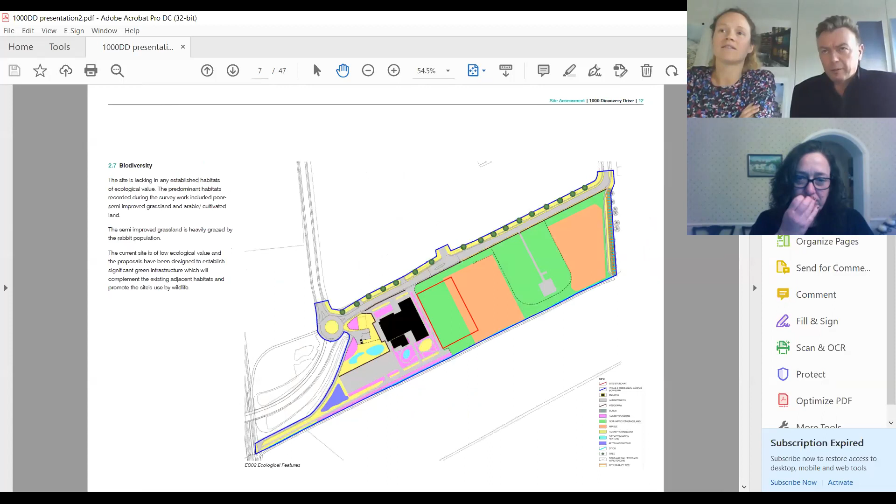So we're going to take you through this. This is actually part of the stage 3 report, so we'll run through this slide. It explains the project, some of the constraints and site issues, and then we go into a bit more detail. Please ask any questions via the web chat.

I think we all know where we are here. It's south of Cambridge, on the Biomedical Campus. If we click the next slide, you can see here it sits in relation to the new AstraZeneca building in the center of the image, and we're adjacent to the Abcam building, which is now complete.

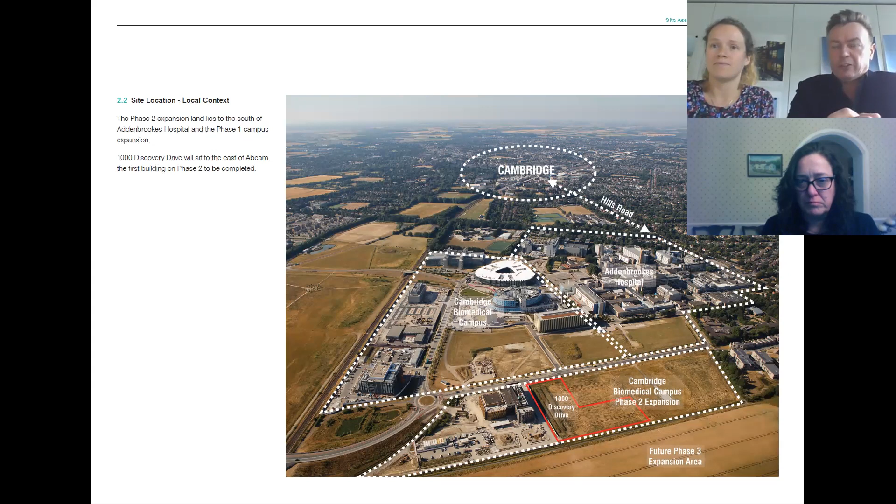This is a slightly old photo, of course, and the site sits on what's known as the phase 2 expansion of the Biomedical Campus. It's the next building along, and we'll see how that whole phase 2 is going to be expanded in the future. Beyond that, there's phase 3 eventually, which sits further south of that site. Here you can see the site location plan: the blue line being the extent of the phase 2 allocation, and the red line is our planning boundary, or as it was.

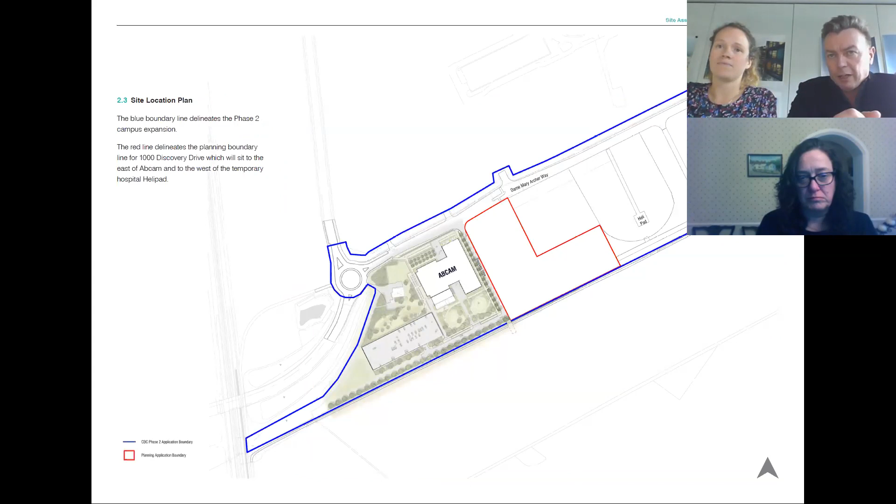As you can see, we've got Abcam sitting next to our site, and the two plots sit very close to each other. These photos, slightly old again, show the Abcam building, which is really a lovely building. If anyone gets a chance to look around it, it's a fascinating design.

We're sitting adjacent to that, and it's worth looking at the materiality of the Abcam building in its context. On the Biomedical Campus there's a whole range of different styles and approaches to the architecture, the latest being the AstraZeneca building. It's worth seeing how this develops, especially in the phase 2 element, because the buildings are structured so they read as a continuation, a family of buildings sitting within their own grouping.

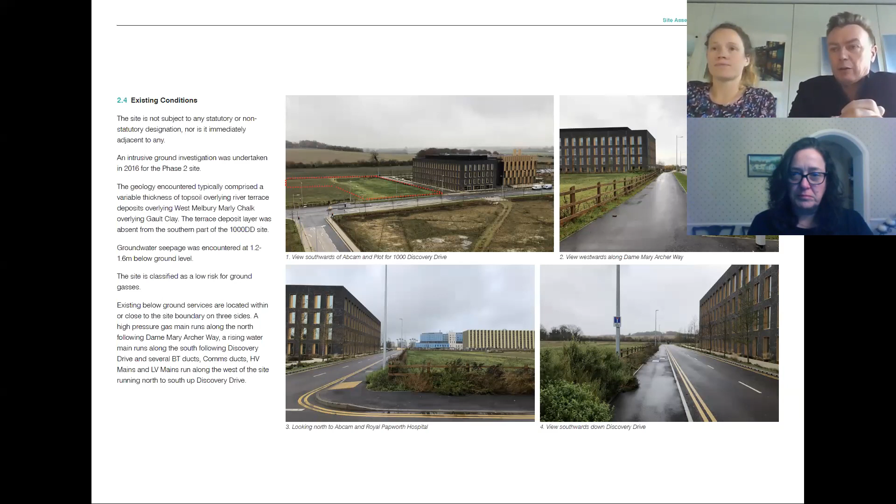As for the site history, it was a greenfield site, just agricultural land to the south of Cambridge prior to the development of the Biomedical Campus. It sits just within flood zone 3, which is medium risk of flooding, with further flood risk assessments carried out by Aecom for the zone itself - it's a very low risk area. But as we know, Cambridge is predominantly flat, especially in this part of town, so it's all of a similar level.

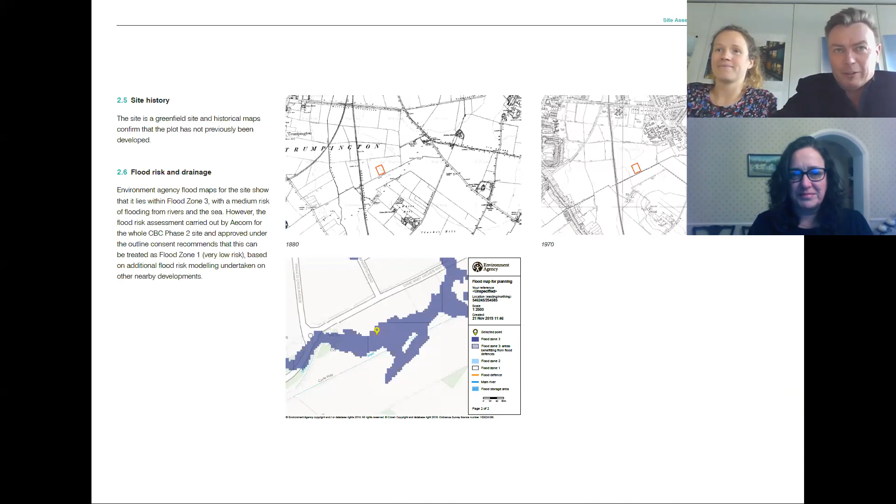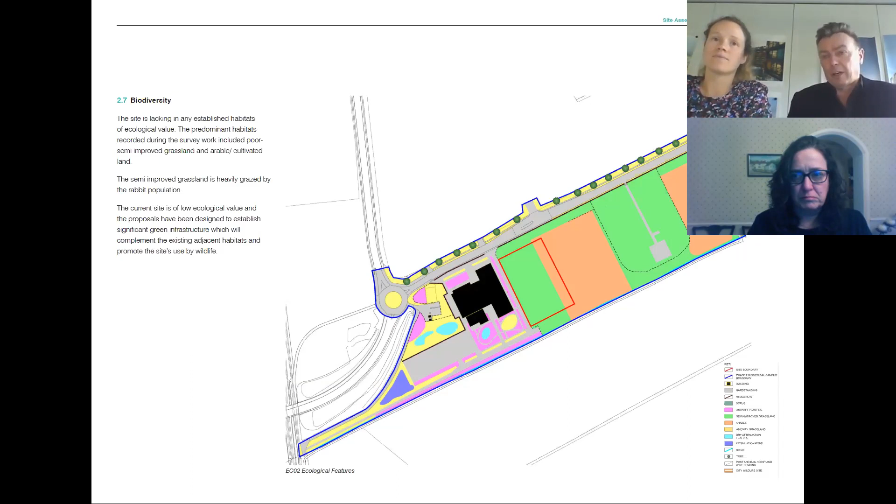It's essentially at the moment just grassland with very little habitat, and the aim of the scheme will be to dramatically increase the biodiversity on site and give back to the existing character. Interestingly, in the latest work we've done on biodiversity, we found that improved grassland actually has a higher rating than you may assume, so it means you have to work quite hard to achieve an improvement on a site which is predominantly grassland, which we've had to do here.

The building sits to the east of the Abcam site and adjacent to it, so there's a certain amount of daylight and sunlight overshadowing which happens in the latter part of the year, around this time of year. But generally we've got good exposure, which means two things: we've had to think carefully about the facades of the building in terms of how they work to minimise solar gain, but also we've got some good views, and it's quite an open site, so it's a nice place to be. Certainly if you go to the Abcam building, you can see the rooftop terrace is very nice for that.

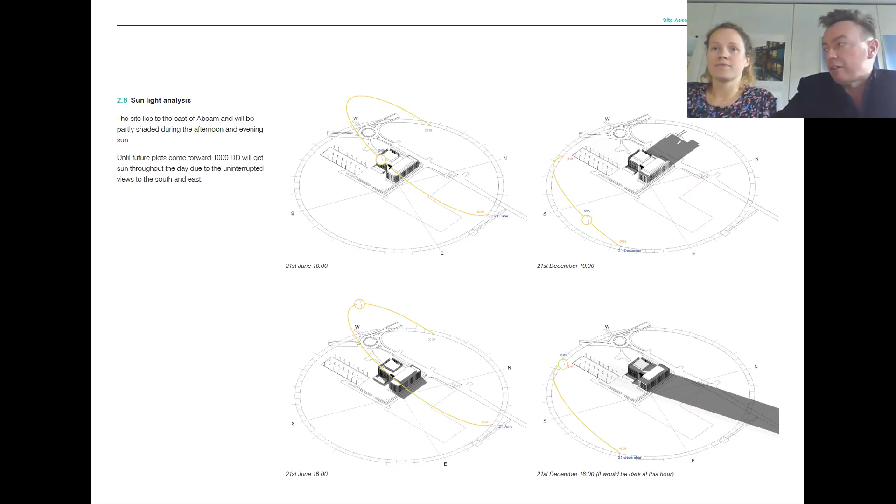As Ed's already mentioned, Cambridge is pretty flat. The site here is also quite flat, and the existing levels down Discovery Drive, the road that separates Abcam from this next plot, is the only real constraint we've got in terms of site levels, because that road's already established and built. That road will continue along the south of the site, so we just need to tie in with those existing levels.

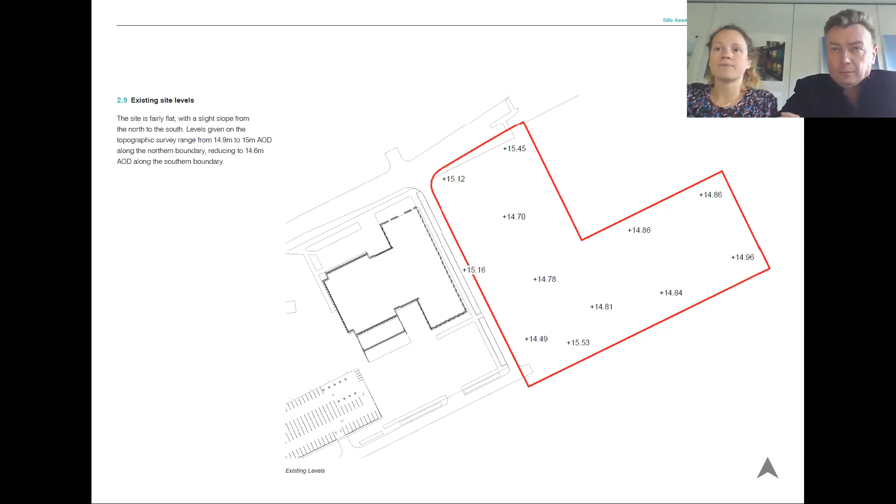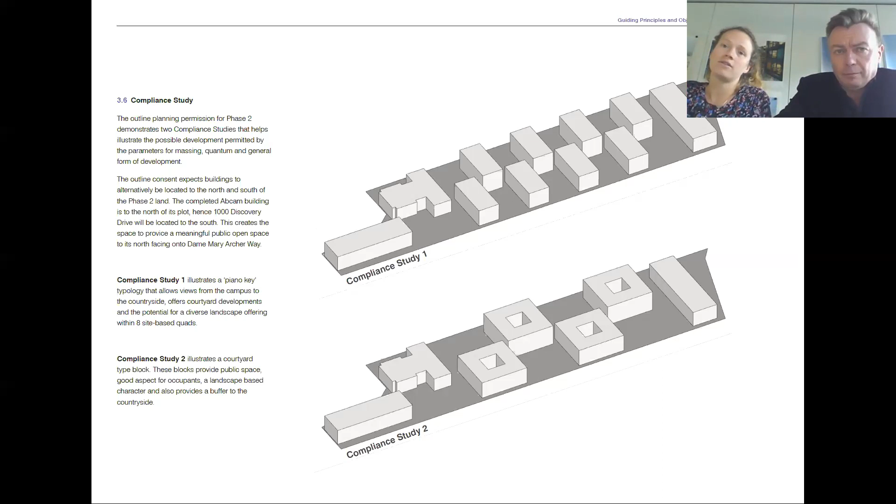This shows you the compliance study. The outline planning permission for phase 2 had two studies undertaken for the potential development permitted by the parameter plans for the massing and quantum of general form of development. Compliance study 1 at the top shows an almost zipper kind of configuration of buildings, stepping in and out, and we did a lot of thinking about how we connect them up, whether we had an internal route running through. Compliance study 2 shows courtyard type blocks sitting in a similar configuration, but bigger buildings, more akin to what we're doing. In between the buildings, it was important that there are green public realm spaces dotted from top to bottom, and that all the buildings along the north can be slightly higher than the ones on the south, as part of the parameter plan.

This shows you the hybrid compliance study. The outline permission allowed for a hybrid approach, so we have 1000 Discovery Drive, which is more halfway between the courtyard and finger building types. It sits to the south of Abcam, to the southwest of Abcam, and the future plot will be developed similarly. There may be changes that come, but predominantly that will be the form of development going forward for the future plots 3 to 7.

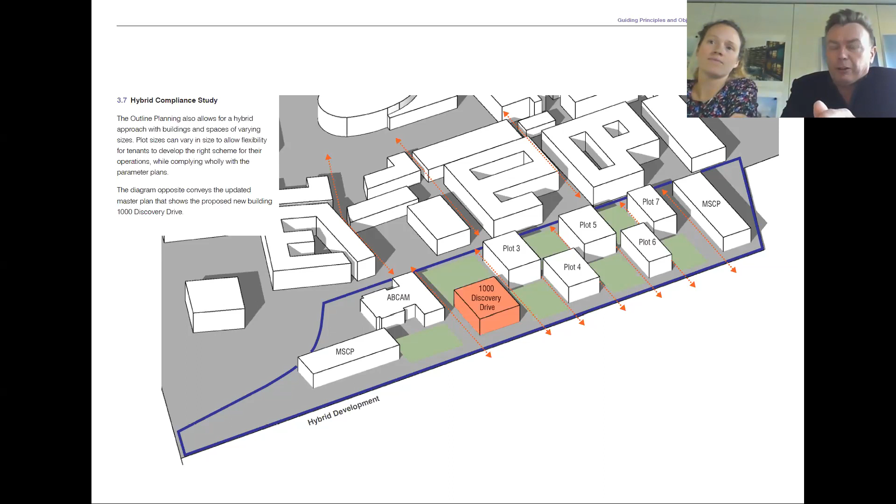Looking in a bit more detail at some of the constraints and opportunities: the zone for development we could actually build in is outlined in the parameter plans. We already know the top bit along Dame Mary Archer Way and the bottom along the landscape buffer is the extent of our site. We've also assumed the next plot, our plot for 1000, would sit to the south of the site. We've got maximum building heights, which don't include the flue height, so for any science and lab building the flue heights can be above and beyond this parameter height. We've also got to factor in a couple of six-meter views in phase 2 that allow views from the Cambridge Biomedical Campus through to the landscaped Cambridge countryside beyond, highlighted in that blue arrow, so we make sure that zone is provided. There's also a high pressure gas main that runs along the north of the site, shown in the orange dashed line.

There are a few constraints that limit us, but there's also loads of opportunities. Ed's already mentioned it's a great place for views, we've got views out across the countryside, we're right next to Abcam, and it's just a great place to be located on the campus and to create this new family of buildings.

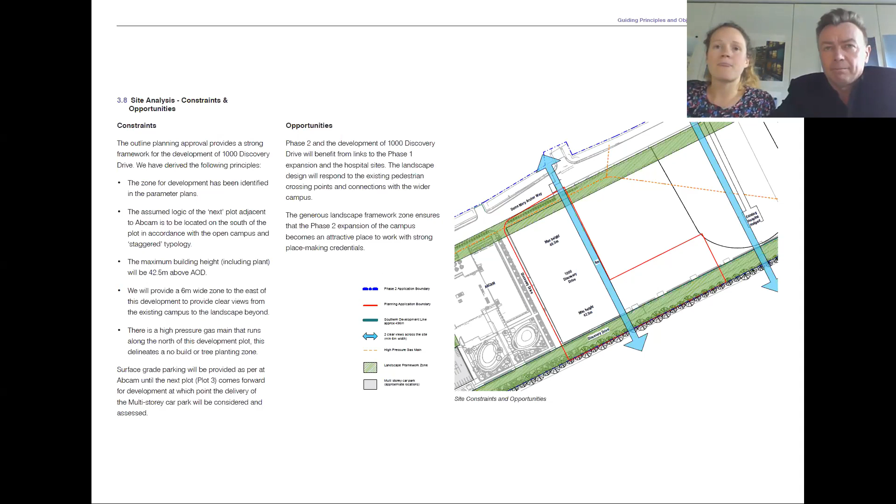So we undertook a number of massing option studies from an early stage. We looked at the building having a U-shaped plan, a donut building, or a staggered H, and each of these was examined for a number of factors: how it sits on site with the parameter plans we've got to work with, the compliance studies we showed you earlier, and what kind of building this is. This is designed to be a multi-occupancy laboratory building.

We've done one on the science park, which is a much smaller version, but this requires a lot of flexibility to be built in, which dictates quite a lot about the plan form. We'll come on to that, but you'll see how that works.

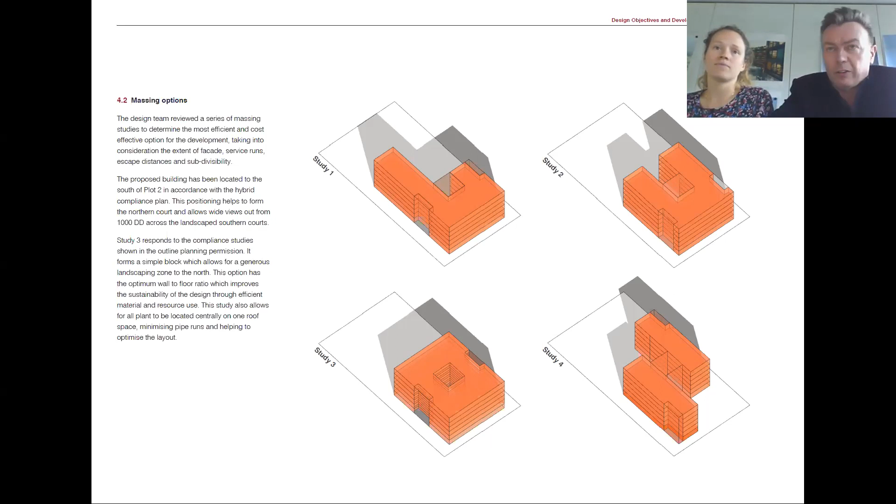So the building became predominantly a square in plan, and then sits back from Abcam so it doesn't obscure any views, but it also has its own freedom and views, and then creates this public space to the north of the building, off Discovery Drive.

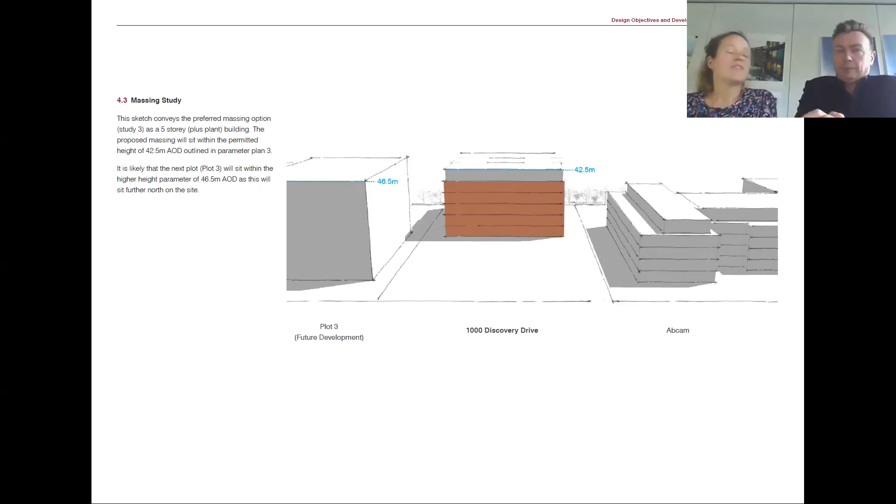The square plan form, when we were looking at the studies, had a really efficient approach in terms of servicing layouts, as it's a spec office and lab building, the service runs needed to be optimized, the facade needed to be optimized, and this became an efficient, optimized layout that allowed us to achieve everything else. The complexity of the building is almost on the inside, with all the different tenancy options and service runs we can have, so it helped to keep the actual building form quite simple.

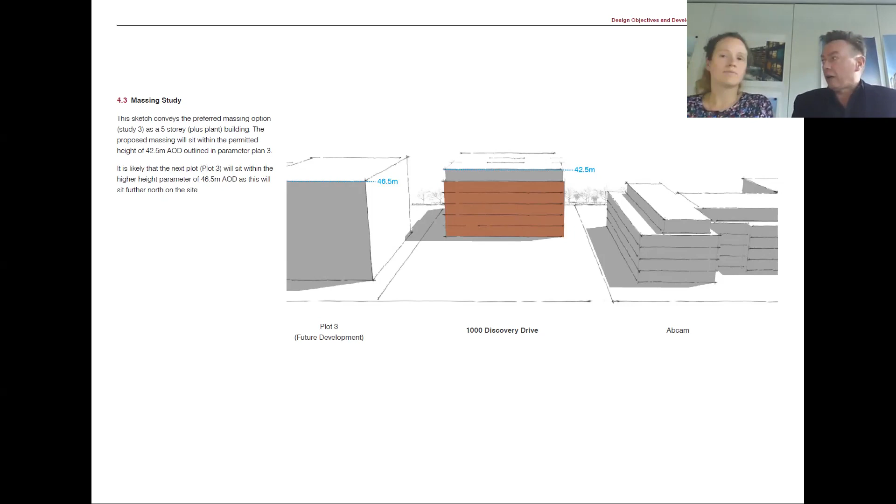I think when you compare that plan to, say, the Abcam building, it's a building of two halves really - on one side it has the laboratory space, and on the other side it has the office space. Obviously if you're doing a flexible multi-occupancy building, those two things integrate and can flow from one to the other, or merge and change. So you can't really do the same kind of H-shaped plan for a building of this nature.

In terms of site layout, we've got the building to the south of the plot, and we were very much working the landscape and public realm to the north. We were guided by key routes, key vistas, the way people approach the site, the way we want to use the site with the sun path, and where people want to eat lunch. We needed to fit all the bicycle stands and really make this a public realm that people want to stay and enjoy, a place where people can work outside.

Discovery Drive along Abcam has got a planted, tree-lined boulevard, so we're also going to mirror that so that Discovery Drive becomes a tree-lined boulevard and a great approach, as that road is the key road that will access the whole of phase 2 in the future.

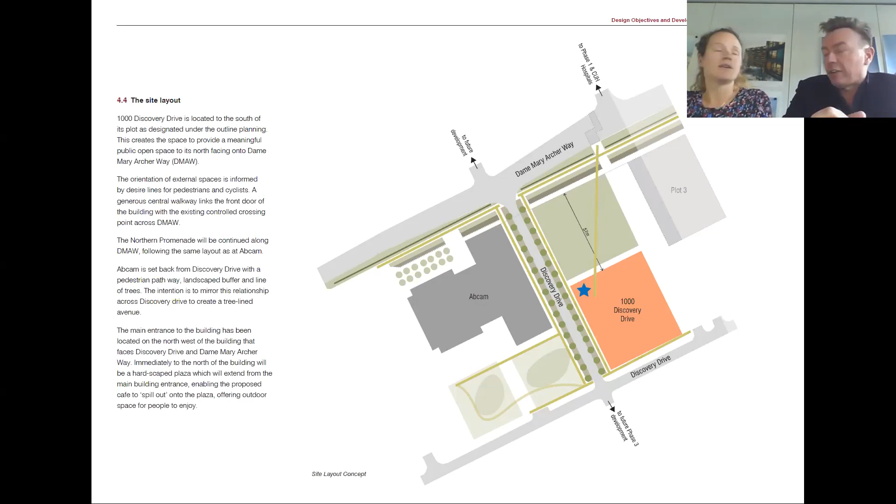And then we've got a diagonal route across from Addenbrooke's and the rest of CBC that comes directly to the front door, that blue star, the front door of 1000. That's informed the layout of the site, but also the plan form and how we've dealt with the entrance way and made a feature of it - quite an important feature.

So you can see that actually on this plan now. The entrance is in the top left corner and is dictated by that diagonal route, which makes quite a dynamic form of entrance. And then, if you want to talk through the plan and how it works.

Sure. So at the arrival space, we've created a central piece that we'll come on to later. As this is a shared multi-occupancy building, there's a cafe, a co-working space, and reception all on the ground floor as you enter into the building, which has got some double height to create a nice atmosphere. Then the building itself has a central core that serves all 5 floors, and 2 side cores for escape routes.

We've put all the plant we can on the roof, but there is a bit of plant, the heavy stuff, on the ground floor, as well as changing rooms, showers and everything for cyclists and runners. And then we've just optimized and maximized all the lettable space where we can. On the ground floor, for instance, this is located on the south of the building so that they still get those views out to the countryside and the landscaping beyond.

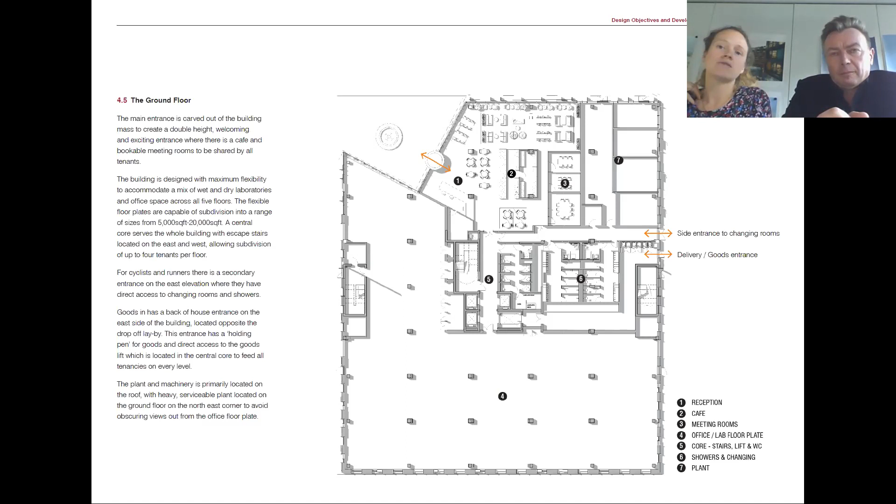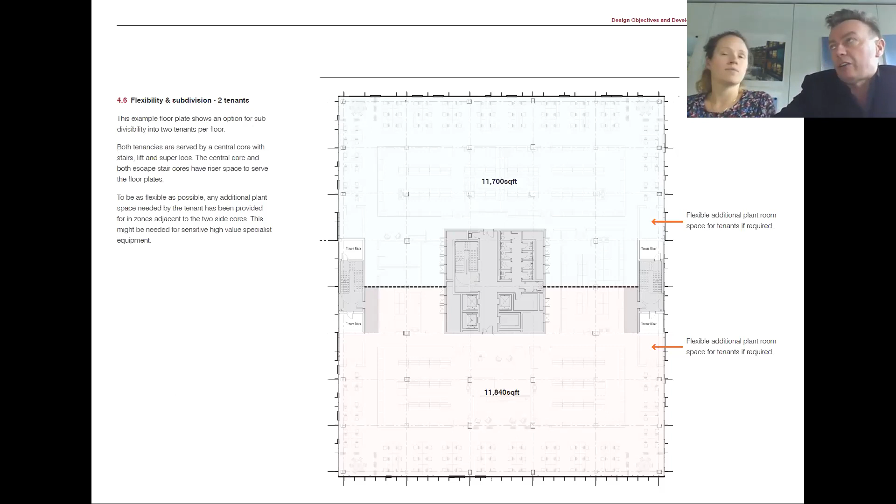And this building is to a shell and core, so it's not dictated at day one about how it's split or how it's divided.

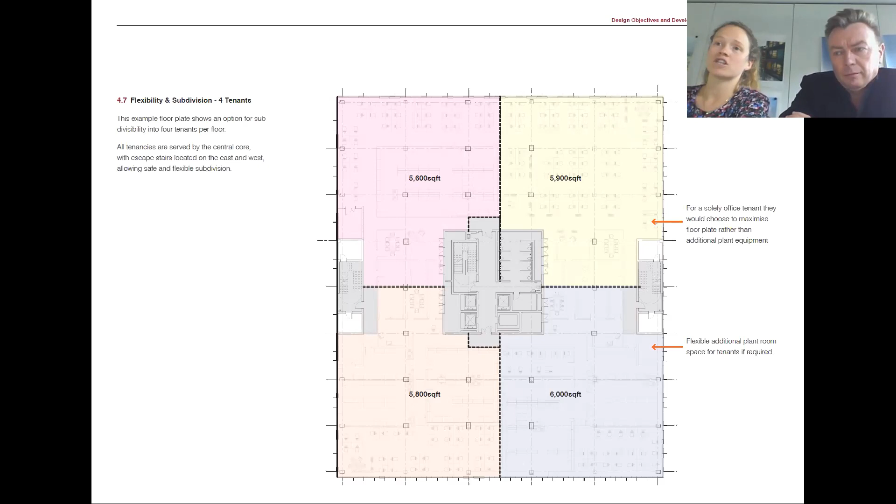Then you have the second option of tenancies where you could split it into 4 tenancies per floor. When you split into 4 tenancies per floor, each one has got to have its own dedicated on-floor plant space, its own dedicated risers and extracts, and equal accessibility to the core, and things like the goods lift. One of the most complicated bits was that even if the floor plate is split into 4 tenancies, each tenant needs to be able to access their risers on every floor throughout the building, hence why such a simple plan actually enabled us to address all the complications internally and make sure the building works functionally for all the tenant options we could end up with.

One of the design features is the entrance space, so you've got a shared communal entrance area. Of course, that means that if you've got a multi-tenancy building, you can't have an open atrium running through it because of privacy issues and that kind of thing, so you would have a glazed-in atrium. It's probably better to have a generous 2-story entrance zone rather than trying to have a glazed vertical riser running through the space.

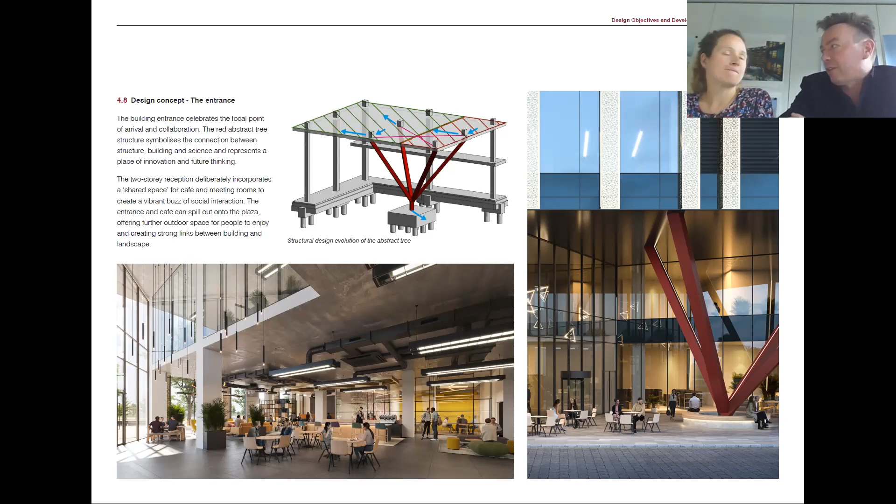And then one of the key features is the structural design of the supporting above the entrance, and we went for this structural tree theme. We tried various options out at the time, and we quite liked that. As the building's cut away, it has this kind of growth of this tree from the middle, which is quite a nice touch. That shows the diagonal form coming in, the entrance feature of the tree, and that transparency cutaway form—it's like a cube with a bite taken out of it.

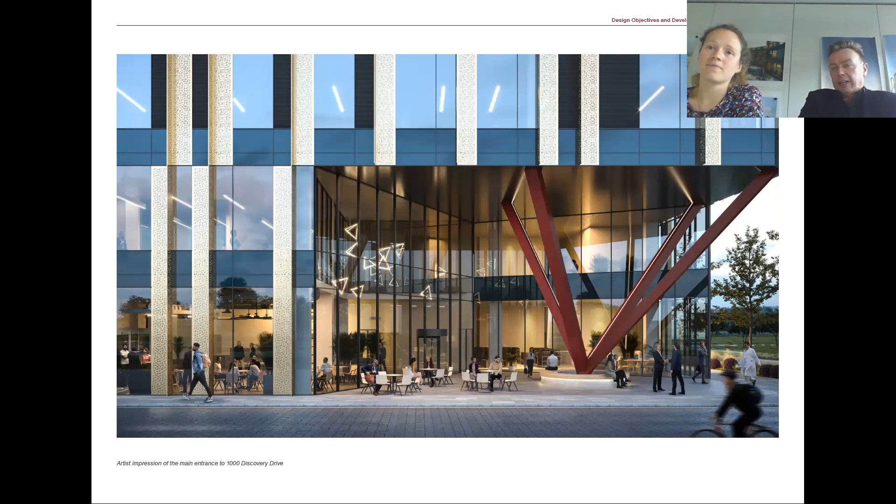So the envelope itself needs to respond to quite a lot of the opportunities and constraints on site. There's a lot of solar gain as the site's quite exposed, and we wanted something dynamic that responded to the sun angles on different sides of the building, as well as privacy in getting the views out, and making sure we've got a really high performing envelope, particularly where we needed it to prevent too much solar gain and prevent the building overheating, and all the energy associated with cooling and heating the building, and how the facade could help us do this with passive design rather than energy.

We also thought it was important in this building to form a dialogue with the Abcam building next door. Abcam sits on its own at the moment in the biomedical campus, and we thought that particularly for this whole phase 2 development, it'd be good if there was a language of a cousin of the Abcam building in terms of its materiality. So we've used similar materials and themes of vertical elements with shading fins on them, deep reveals, and we're using brick around the back, the south-facing side, which has less glazing. The front of the building is actually north facing, so it's more transparent, permeable and ethereal. Around the back, it's much more solid and grounded, which reflects some of the materiality on the Abcam building.

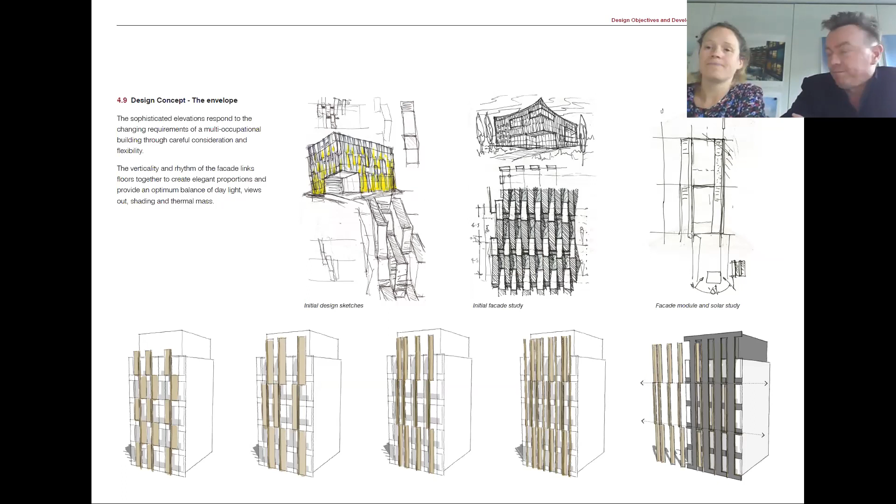I think here you can see a side elevation, and you can see that change of materiality over the side of the building. So on the left here, towards the front and the entranceway, we have this light, glassy facade with perforated aluminium and shading features. Really, that's about filtering light and creating a really nice piece of architecture.

And then to the right-hand side, which is actually towards the south and the more exposed side of the building, it becomes more solid. It has this bricky texture, some deep window reveals to create shading, and a similar color and material palette to Abcam next door.

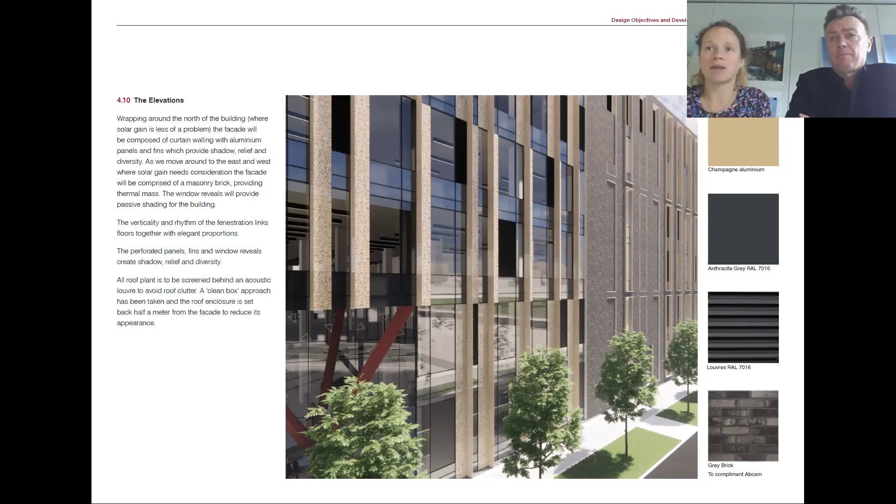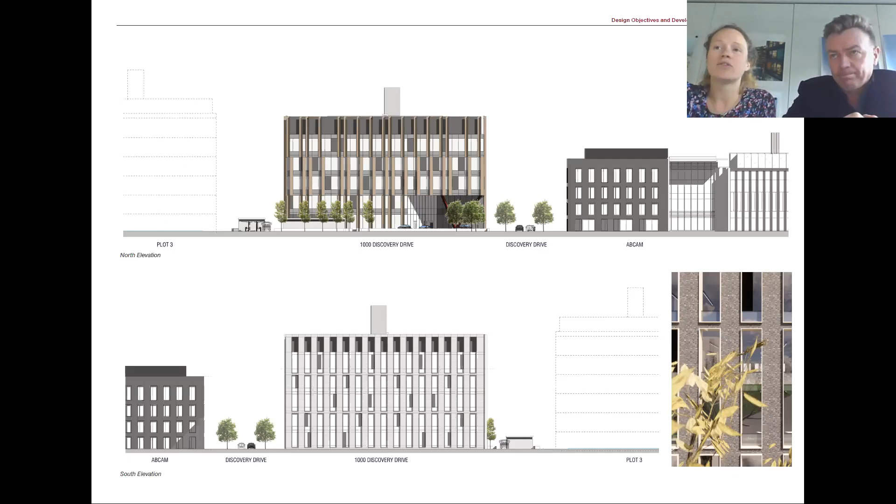This is one of our quite early renders, pre-planning, which shows the aluminium fins with the perforation patterns wrapping around that northern elevation to create that focal entrance space.

It's a lab building, so it has a lot of plant. The whole of the roof space at the top is completely full of plant equipment, screened by louvers at top level. This also allows flexibility and future adaptability, since we don't actually know who the tenants are to start with.

We've designed a clever facade that allows us essentially a random but controlled array of louvers on every tenancy, to allow soft spots where future tenants can plug and play, without having to smash up the facade every time they want to do some work or change a layout. They can plug into the existing louvers on the facade.

Multi-tenanted, multi-floored lab buildings have this dilemma: you have to put in your plant riser space and your central flue extracts, which are landlord controlled and landlord supplied, but also you want to allow flexibility for every tenant to have the ability to change and adapt. So they need the ability built into the design to connect plant to the facade to bring air in and extract.

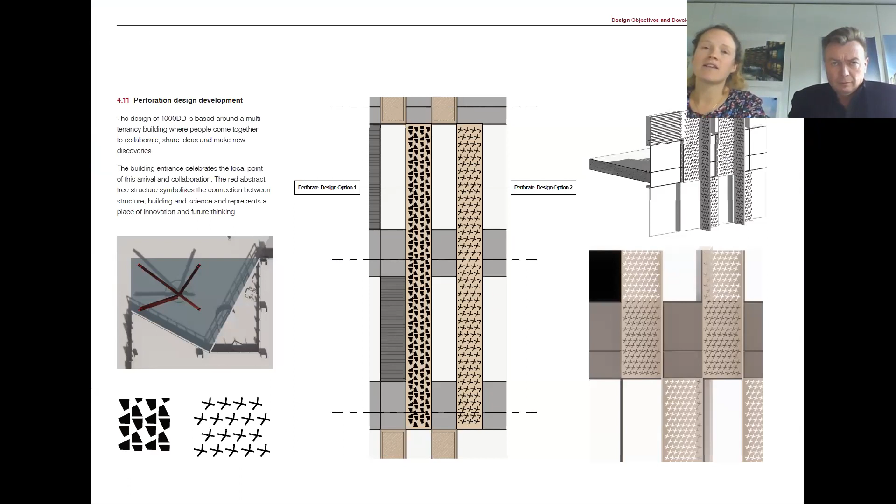So it's a growing dialogue between architecture and the science that it's supporting.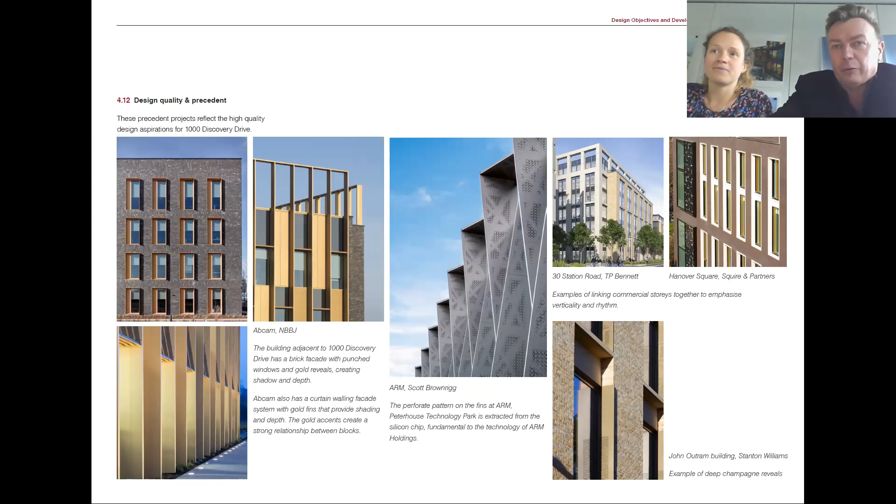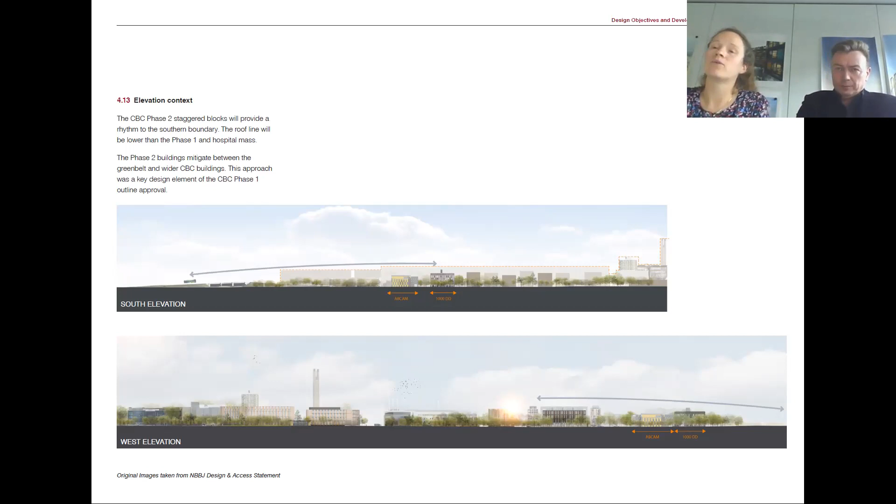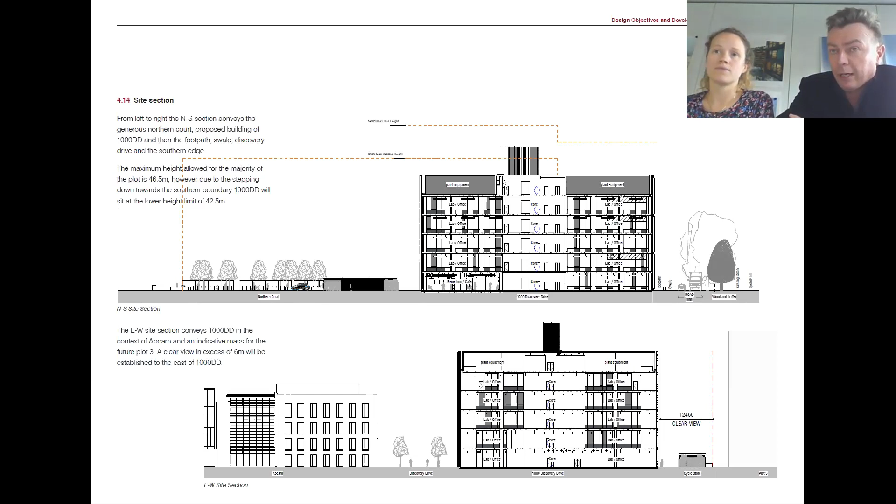There are two ways of thinking about these types of buildings. They can either be lab-enabled office buildings, allowing conversion to laboratory space, where you'd have about 4.1 meters floor to floor, which is what we've done a lot on the science park, with some as labs and some as offices in their tenanted fit-out form. But this is much more a lab-ready building, designed to be lab from first principles, meaning 50% lab, 50% office, designed to be that flexible laboratory space from day one.

Just looking at the height comparison between Abcam and the new building, it's interesting looking at those floor-to-floor heights. If you look at Abcam, it's got office space on the left and lab space on the right, and the floor-to-floor heights are different on both. Whereas this building has one floor-to-floor height running throughout.

That top view also gives you an idea that even just stood in the public realm, you can never see the flue tower. It's due to perspective, it's actually not visible - tucked away.

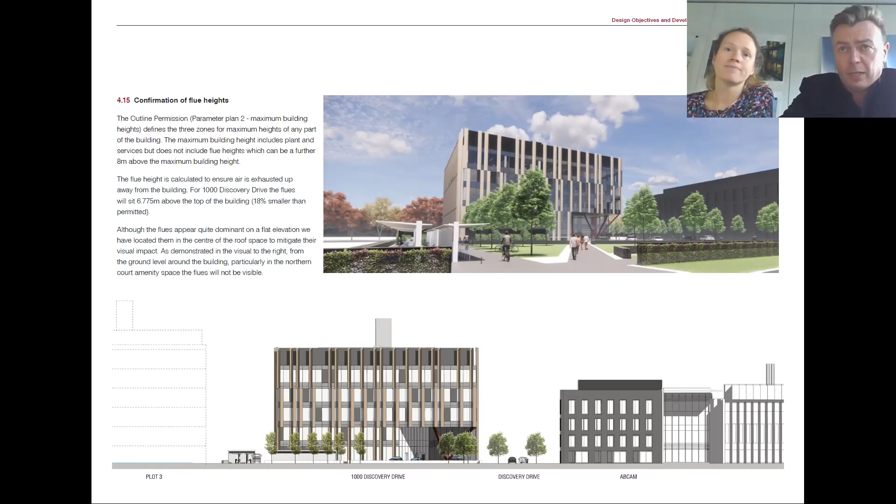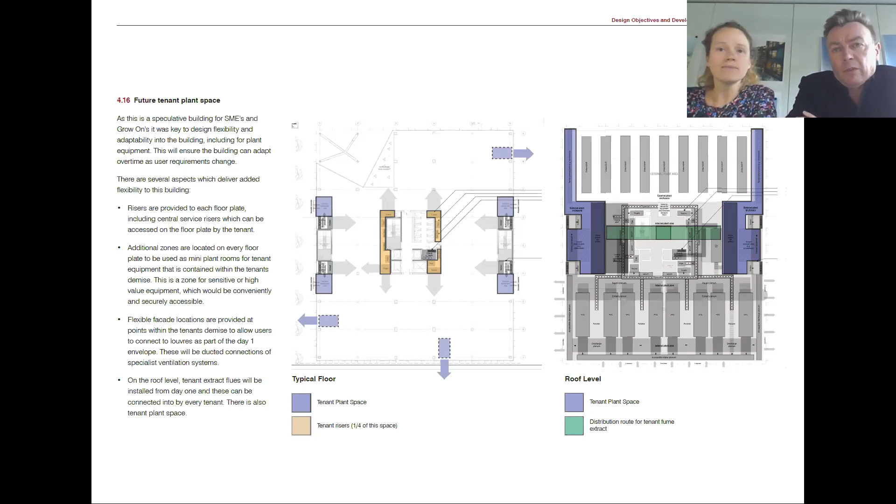We also factored this in - the purple shows tenant plant space, and there are special areas where tenants can put their plant within their demise. There are also soft spots in the facade and floor where they can add in high value equipment - if it's an office, it's just given over to office space, but if it's a lab tenant, they can take over those purple areas next to the side cores and add additional plant. There are also soft spots in the facade, indicated by those arrows, where they can plug and play.

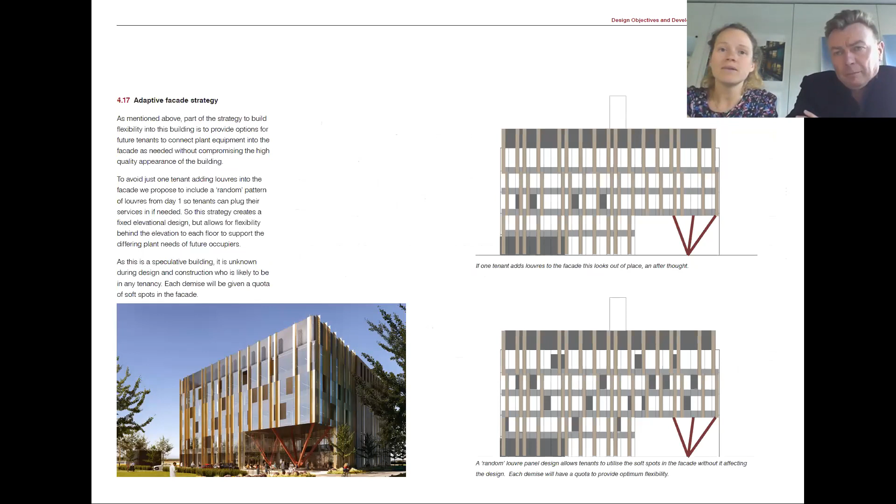This is a bit more on the adaptive facade strategy, with a random array of louvers to make sure we don't end up with something that looks terrible when they've had to retrofit. It's all about allowing the flexibility from day one, optimizing and making their lives easy for the services.

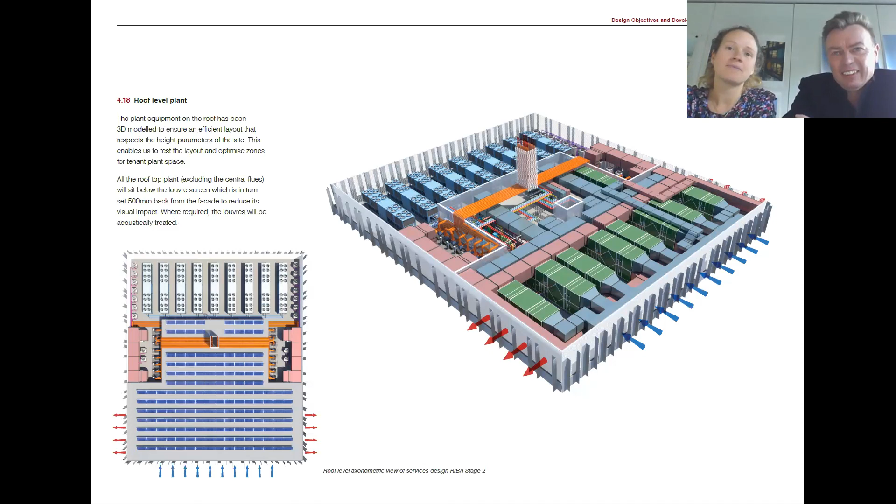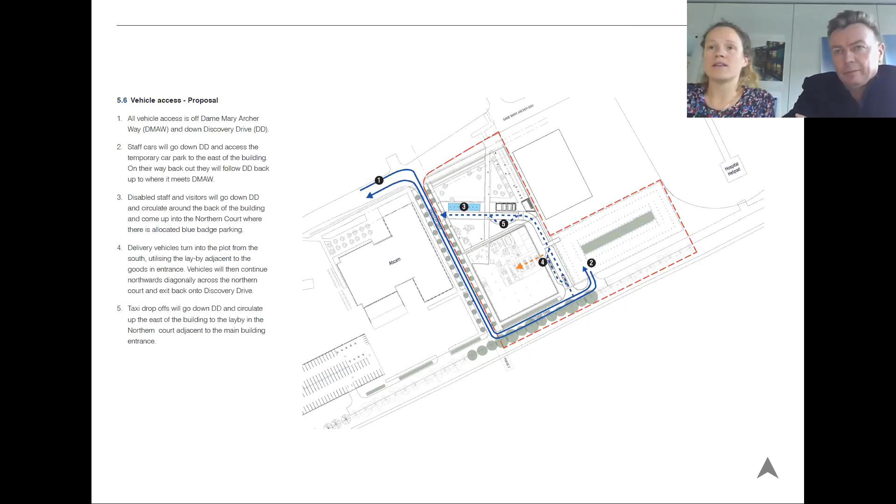All those cars will then park at the multi-story car park to make sure that phase 2 is pedestrian friendly. It's all about the landscape and the public realm and the buildings within it. It cleans up the site from a sea of parking as it used to be on the science parks. Also, with this being multi-tenanted, up to 20 tenants in the building, there could be a turnover every time one of those tenants refits. It was really important that there's a lay-by that can accommodate tenant fit-out deliveries, located on the east there.

We've got a limited amount of blue badge parking for disabled users in front of the building, close to the entrance, accommodated knitted into the landscaping. The rest is in a temporary car park on the right-hand side there.

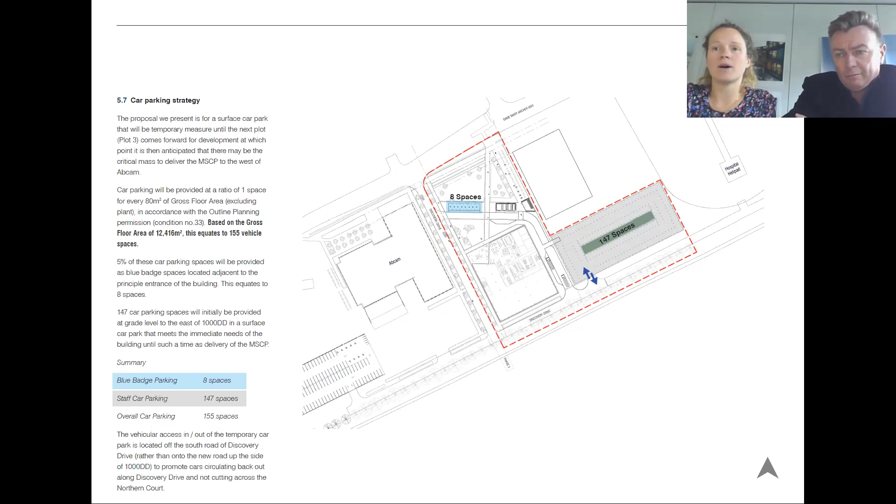We won't skip over this one. Yeah, tracking, to ensure it all works.

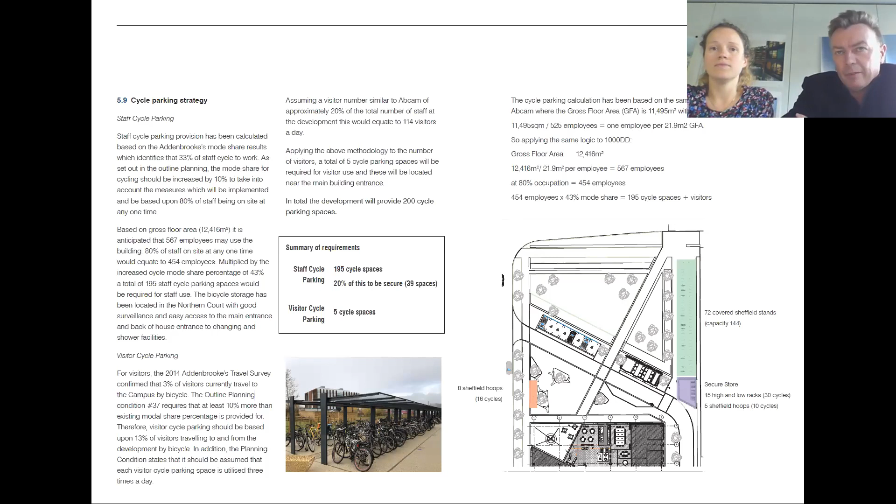Cycle parking supply - obviously this is Cambridge, so cycle parking strategy is highly important. We've got nearly 200 cycle spaces, secured spaces, served at the front of the building. We feel it's important that this is a highly cycle-enabled building, as any building in Cambridge needs to be now. So that's out front and centre, not something we have tucked away.

Alongside that, we have the refuse pavilion, which is probably slightly bigger than it would be for other buildings because it's a lab - you've got all your gas stores, the ring main units, and other bits.

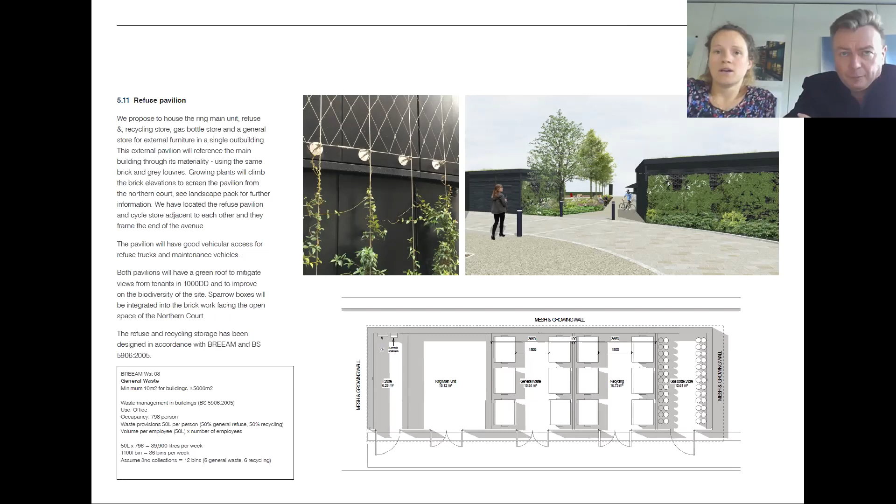In terms of sustainability, along with the phase 2 outline planning, it has to comply with a bespoke sustainability strategy and is also targeting BREEAM Excellent. The building itself - we've mentioned a few of the bits in terms of making it super sustainable - optimizing the facade, and the building form that we chose to make it really compact and efficient.

Also this inherent flexible design means the building can be adapted and accommodate multiple tenancies for the foreseeable future, rather than having to demolish the building to start again, or do too much large alteration. Hopefully it's designed quite loose fit so that it can accommodate a whole range of office lab tenants for the foreseeable future.

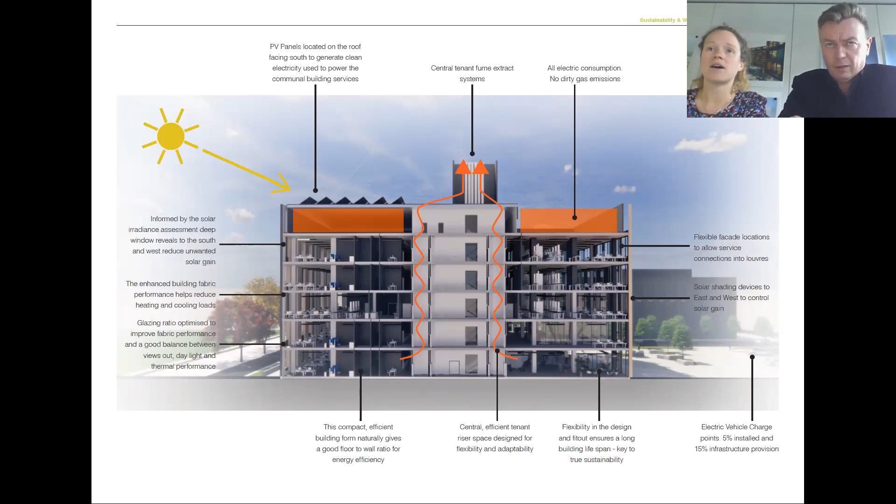So I think that brings us to the end of the presentation. I think we've covered everything, so we're happy to answer any questions you may have.

I think it's going to be an interesting new building for Cambridge because of the flexibility it allows, and that kind of incubator space and multiple tenancy space is in high demand in Cambridge. We've built one in the Science Park, for TusPark, and that has proved to be very successful, having full tenancy over the entirety of the pandemic. So I think this space is going to be very popular.

Thanks, Alison. If you're still there, hopefully you can run through any questions, because we haven't got the chat open.

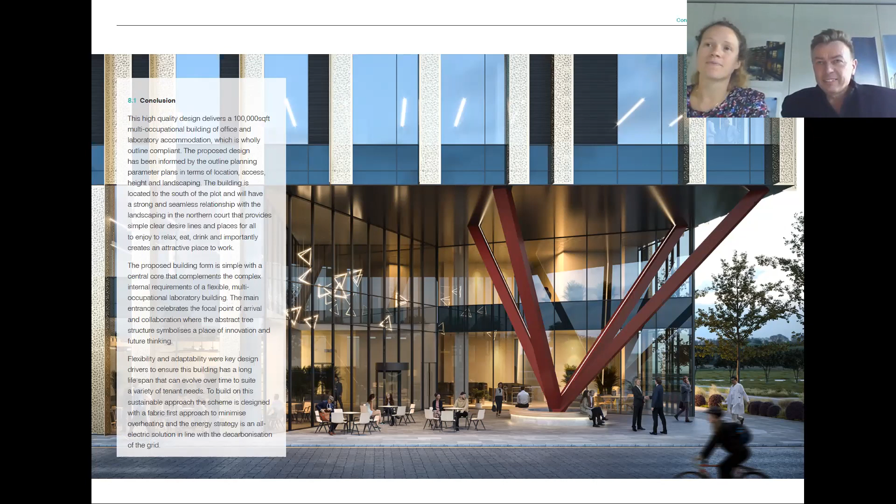Well, the good news is I have. Thanks ever so much, Ed and Flick. That was really great. Obviously I'm a bit privileged because I know quite a bit about the scheme anyway, but I hope the participants found that informative.

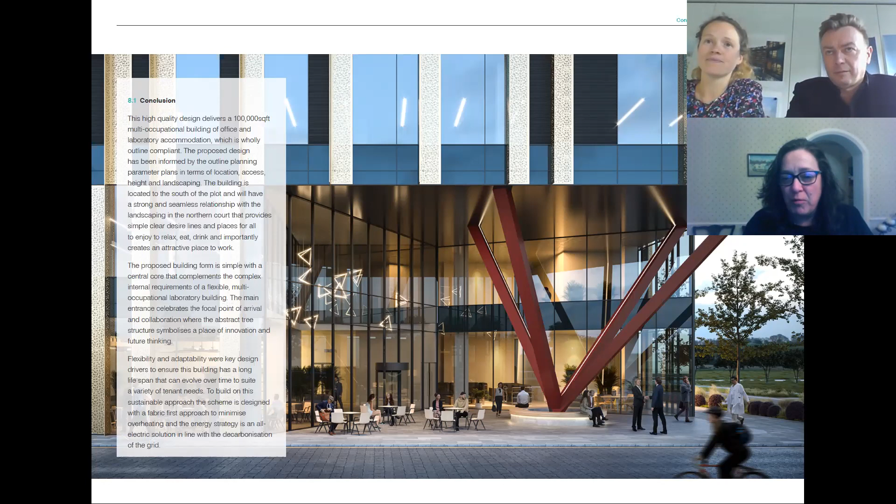We've got a few questions coming through. The first one we've got is: what low energy carbon initiatives did the project embrace? You touched on some of these - were they client driven or planning driven?

Both really, yeah. Laboratory buildings are by their very nature a more difficult, more challenging building to make low carbon. So you've got a number of challenges. You've got the low carbon in construction, and the nature of this building is that it needs to be a concrete framed building.

You have to consider low carbon concrete and cement replacement, and you can get quite far with that. We would generally be pressing to use timber wherever possible, but it's just not an applicable material in this context. For the frame and structure, I think there are examples of timber laboratory buildings - GSK built one at Nottingham - but multi-tenanted, multi-storied lab-ready buildings, it's a tough challenge, and I think it's a challenge we all are going to face going forward.